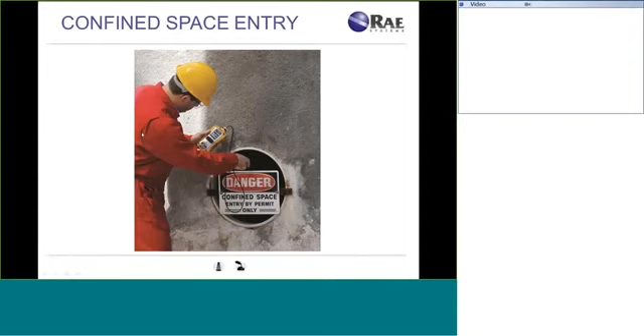Just to give you a quick reminder of how confined spaces are defined by OSHA: that's covered by OSHA Standard 29 CFR 1910.146. So a confined space is large enough for a person to enter and perform assigned work in. It is not designed for continuous occupancy, and it has a limited or restricted means of entry or exit. That's why it's confined.

But the type of confined space of particular interest to us for this webinar is permit-required confined spaces. According to OSHA, the difference that a permit-required confined space brings compared to a regular confined space is that it can contain, or has the potential to contain, a hazardous atmosphere. And that is very relevant to our topic today.

So gases, whether toxic or combustible, or oxygen deficiency or enrichment, are the potential threats within a permit-required confined space. Now, a permit-required confined space may contain a material that can engulf someone who enters the space. It may have a configuration that may cause a person to be trapped in it, and it may have other recognized serious safety or health-related hazards.

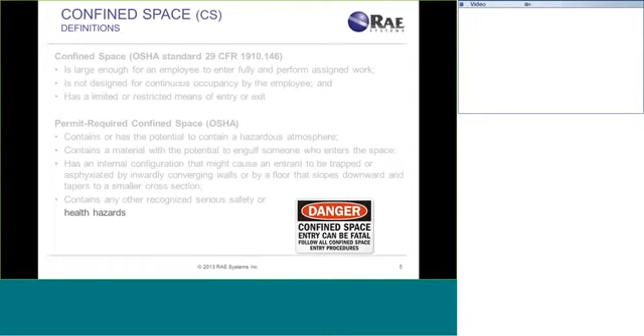So permit-required confined spaces is what we're going to focus on today, and we're going to see how wireless is making entry into permit-required confined spaces safer.

Now, let's take a quick look at the participants involved with a confined space entry into permit-required confined spaces. There is a person actually doing the entry and performing work inside a confined space. Then there is an attendant who is directly watching that person. And there is an entry supervisor who is responsible for the entire process.

Here are some duties that different participants in a confined space entry have to fulfill according to OSHA. These are just select duties. There are big lists of duties that OSHA outlines for each of the three types of participants, but we're going to focus on those that can be simplified or improved using wireless technology.

One of the things that the entrant has to do, according to OSHA, in addition to the actual work they do inside a confined space, is to maintain communication with the attendant, to inform the attendant of the status of the person performing confined space entry, and to enable the attendant to make decisions related to whether it's safe to proceed or necessary to evacuate.

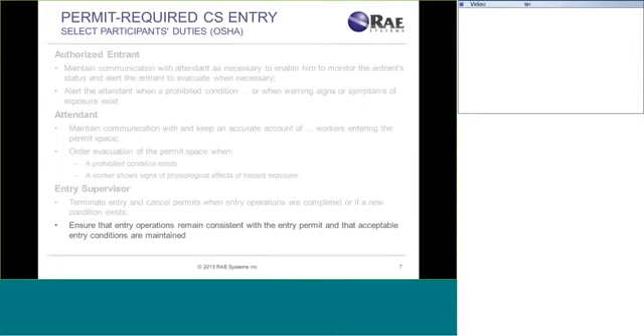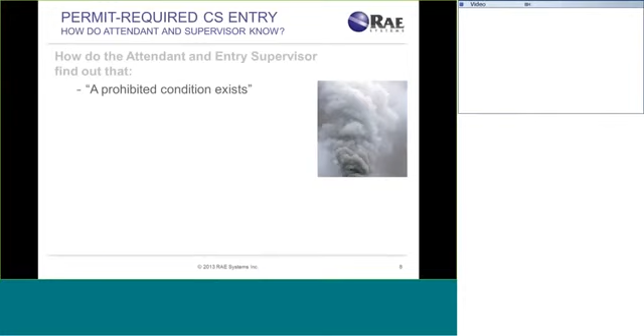Now, there is a very important question that remains regarding how the attendant and the entry supervisor, who remain outside a confined space, find out that, for example, a prohibited condition or a hazardous atmosphere emerges inside. How do they know that the worker is down, or shows signs of physiological effects of hazardous exposure, as OSHA defines it? How do they know that acceptable entry conditions are maintained throughout the process of confined space entry?

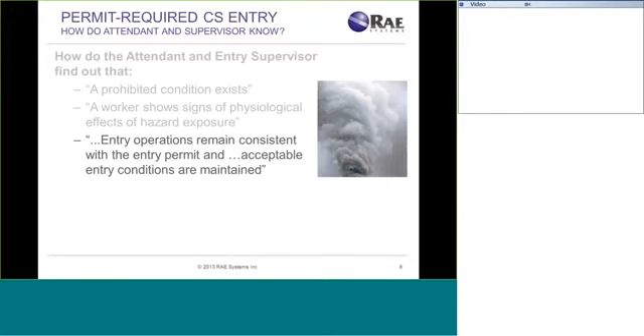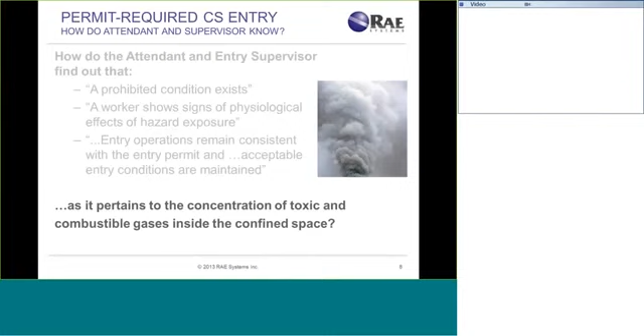What we're looking at here is really gas detection-related hazards, as well as man down, as the condition of the entrant. There are some things we're not covering in this webinar because this is a webinar about gas detection, so we're looking at the conditions of the atmosphere inside a confined space. There can be a lot of other factors that may make the conditions of confined space entry unacceptable, but we're focusing on toxic and combustible gases as well as oxygen deficiency or enrichment.

So the old ways, the common ways for the attendant and entry supervisor to get information about the conditions of a confined space, is really to rely on the entrant to communicate all that information back. As it pertains to gas concentrations, the entrant would be required to look at the monitor with a certain periodicity and then communicate the readings of the concentrations of toxic and combustible gases and oxygen inside the confined space over a walkie-talkie to the attendant or the entry supervisor.

Now, there are some potential issues with this approach as they pertain to safety and the ability of the entrant, the attendant, or the entry supervisor to react to changing and potentially hazardous conditions quickly. The reason for that is neither the attendant nor the entry supervisor know directly and immediately what is going on inside a confined space or what is happening to the entrant. They rely on the entrant to obtain that information.

So in case, for some reason, the concentration of a toxic gas or combustible gas, or the oxygen itself inside a confined space changes, they will not know about it unless the entrant reports it. What happens if an entrant has been overcome? The attendant or the supervisor would not know that until the next planned communication session. That is not going to happen because the person is overcome, and so it may be too late.

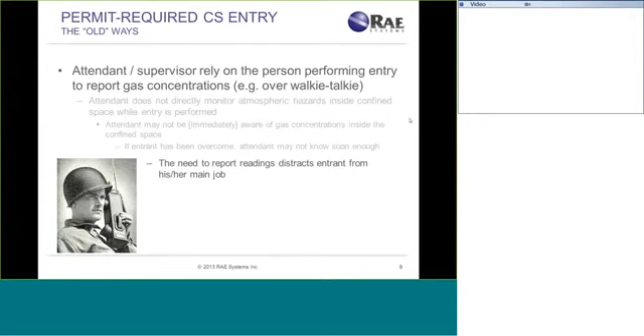Now, even if everything goes well, the entrant doing work inside a confined space, which is the reason for that entry, would have to distract themselves from performing that work in order to periodically report back to the attendant on what is going on and let them know everything is okay. So there are some inefficiencies with this process, with the current way of doing it, and in some ways it has inherent limitations in terms of the ability to deliver help to the entrant quickly.

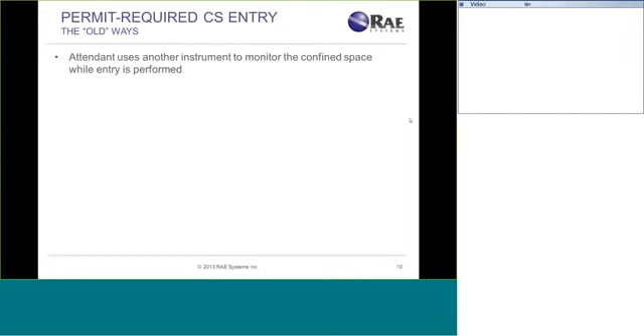Now, a better way that is used currently is for the attendant to use another instrument, a redundant instrument, to monitor the confined space in order to be able to directly get first-hand objective information on the condition of that confined space, the atmosphere inside a confined space. And there are a couple ways in which this is done.

There are some legacy instruments that allow the attendant's instrument to directly communicate to the entrant's instrument over a cable. So the entrant is physically tethered to the attendant. The entrant's instrument is connected to the attendant's instrument with a cable. And the attendant's monitor really shows exactly the same readings as the entrant's monitor shows, so that the attendant is aware firsthand of what is going on inside a confined space.

Another way is for the attendant to have his or her own instrument that has a sampling line that goes straight inside that confined space, so that the attendant's instrument is not tethered to the entrant's instrument, and the attendant gets objective information on the condition of that confined space by drawing a sample from that confined space.

So there are some potential problems with that, because if it's a stratified, if it's a tall confined space, then the attendant may not exactly know the level on which the entrant is physically located, since different gases, potentially hazardous inside a confined space, can be present at different levels of that confined space. And then the attendant may be monitoring from a different level than where the entrant is, and there could be a danger at the entrant's level of the confined space, and it could be all clear at the level from which the attendant is monitoring. So there is no guarantee that the attendant will be monitoring gas concentrations from the right strata of that confined space.

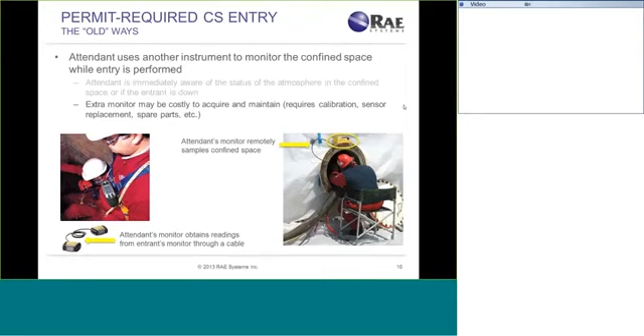Now, keeping that in mind, in some cases, even with the new wireless approach to confined space entry, it may be beneficial for an attendant to have a second monitor, right? Because if it's a stratified confined space, and for example, if the attendant needs to be able to get information from the entrance to that confined space, for example, for rescue workers to be able to enter and make decisions on their personal protective equipment, in that scenario, it's very beneficial for the attendant to have a second monitor regardless.

But let's look at the new way. A lot of our customers have discovered the benefits of wireless to be so significant for confined space entry, for the improvement of safety related to permit-required confined space entry, that this is their standard operating procedure.

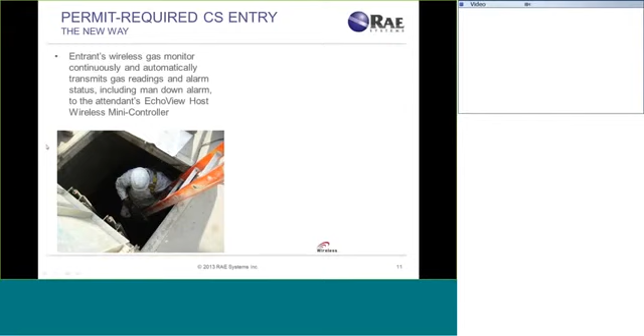So instead of using a regular multi-gas monitor, an entrant has a wireless multi-gas monitor that has a wireless modem inside. So this way the monitor wirelessly transmits its readings and alarm status to a portable mini controller, a wireless device that shows the attendant the real-time readings and gas concentrations of the entrant's monitor. Now, keep in mind that the wireless monitor transmits continuously, and it also does so automatically, so the entrant does not even need to worry about making sure the attendant knows the gas readings inside a confined space.

So the attendant's EchoView host mini controller, that you can see in the picture, shows real-time gas readings and alarm status from the entrant's monitor. And by the way, if there are multiple entrants, the EchoView host can display readings and alarm status from multiple monitors, up to 8 monitors at a time. And that mini controller has its own audible alarm. It has alarm lights as well to attract the attendant's attention in case the entrant's instrument goes into alarm.

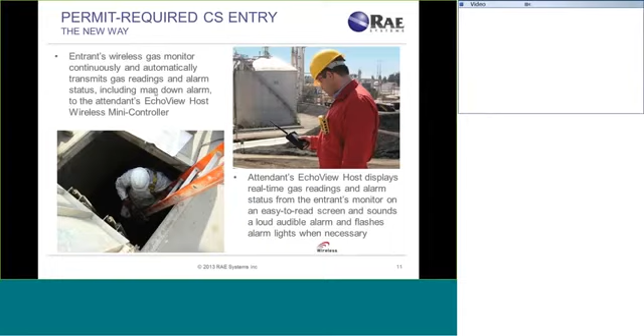So what are the elements of this solution for the entrant? And if the attendant uses a redundant gas monitor, the solution includes a wireless multi-gas monitor, such as the MultiRAE family of wireless multi-gas monitors. These instruments have not only the built-in wireless capability, they also have the man-down alarm.

And the man-down alarm activates in case the entrant is not moving for a certain period of time while the entrant is supposed to be moving and performing work. So the instrument assumes that the person is down, the person has been overcome, and provides the person a notification asking if the person is okay. And if the person says, yes, I'm okay, then the man-down alarm does not activate. But if the person does not say, yes, I'm okay, or says, no, I'm not okay, the man-down alarm activates, and the attendant knows about it immediately.

So the attendant and the supervisor can have their own mini controllers, the EchoView hosts, as we call them, and these mini controllers would display information from multiple instruments, like we talked about, and they can be at significant distances. The typical distance is 660 feet; it is going to be less than that in case the signal has to go through metal, but it would stay sufficient for most confined space entry, even if the confined space is actually a metal or a steel structure.

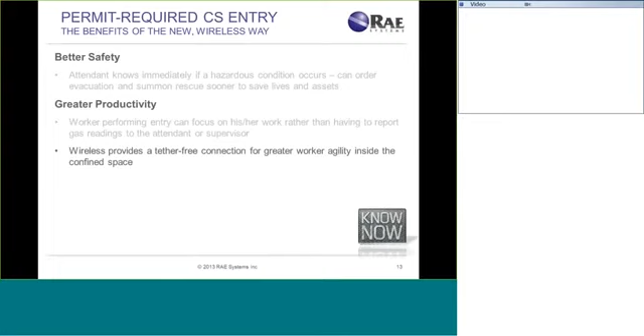And of course, the lower cost. The EchoView mini controller is virtually maintenance-free. All it requires is a periodic battery replacement, and the battery lasts 10 days, 24/7, which is unlike a second redundant gas monitor, which requires maintenance, sensor replacement, calibrations, etc. So the wireless way of performing permit-required confined space entry delivers better safety, greater productivity at a lower cost.

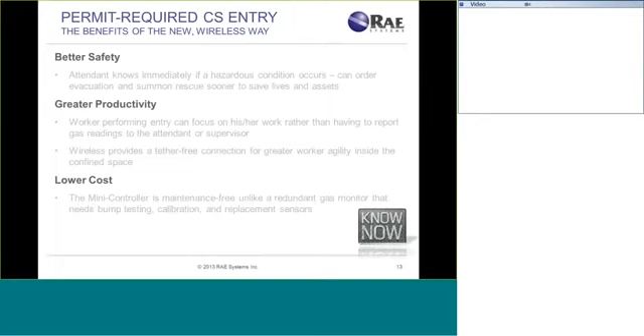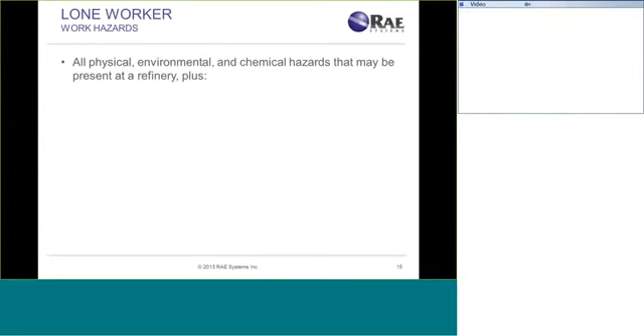So the next application I would like to discuss is the safety of lone workers. Lone workers are people who do their work without having other people in immediate vicinity. So they do work unsupervised, and in addition to that, there may not be any person around to help out or call for help in case something happens. So work hazards that lone workers experience at a facility include all the typical work hazards at a refinery: physical, environmental, chemical, electric, falls, etc. But they also have nobody around to call for help in case the lone worker has been overcome.

So how is safety monitoring of lone workers done these days? It usually involves a multi-step program to make sure that the lone worker is okay, does the work safely, and returns home every day. That may include the supervisors periodically going out and physically visiting the people that work alone to make sure that everything is okay. Then they could maintain a pre-agreed schedule of regular communications that occur between the lone worker and the supervisor or the safety officer at the command center.

For that, they would use either phones, if it's safe areas, or intrinsically safe walkie-talkies to communicate if it's a hazardous area, or both, depending upon the area classification at a refinery, for example. Now, the people at the command center and the supervisors can use warning devices that can trigger alarms in case no communication from a worker working remotely has been received. And there could also be a system implemented that ensures that a lone worker has returned to their base after completing his or her job.

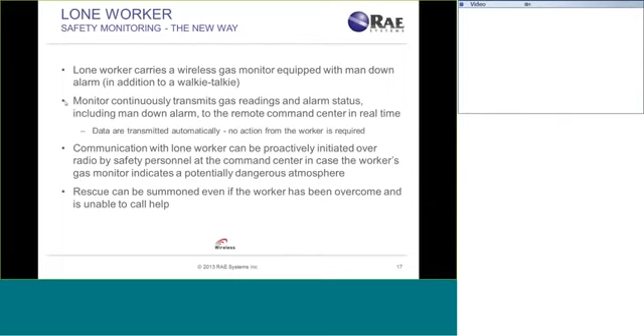So the elements of the new wireless solution for lone worker safety include the wireless gas monitors, both single gas and multi-gas, accompanied by a portable modem that, in addition to being able to transmit the signal to the remote command center at distances up to 2 miles, provides accurate GPS-based location information to the remote command center, and the remote command center that runs the RAE Systems ProRAE Guardian real-time wireless safety system software that can overlay the location of the remote worker on the custom map of the facility, so that they know exactly at each point in time where the worker is located within a 15-foot range, within a 5-meter range. It's so accurate.

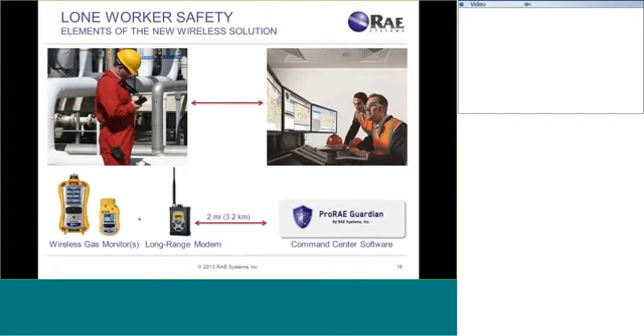So what are the benefits of a wireless-based lone worker safety solution? The key benefit is enhanced safety, where the personnel at the remote command center or the supervisor of that lone worker know immediately if a hazardous condition occurs or a worker has been overcome. This way, help can be dispatched quickly and lives and assets can be saved. Now, better productivity. The worker does not have to report the readings of the gas monitor that he or she carries. This is all done automatically by the monitor wirelessly, so the worker can focus on the work he or she is doing.

Now, the supervisor and the person at the remote command center can spend less effort and less time communicating with the worker just to obtain information on the condition of the atmosphere where the worker works, so that they do not have to request the worker to communicate gas readings from his or her monitor on such a frequent basis, because they have visibility into it continuously in real time. So the Lone Worker Safety Solution delivers improvements in safety and better productivity of lone workers and their supervisors while the workers are performing work at remote locations of the facility.

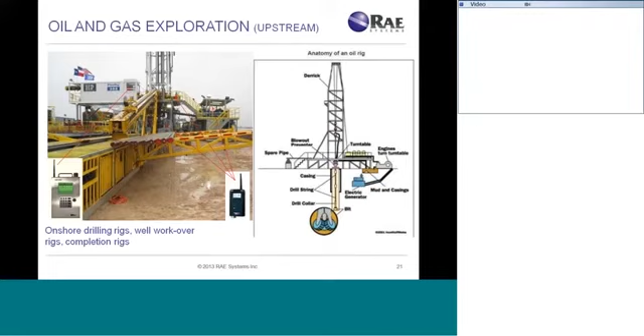Typically, a rig would install several wireless gas detectors around the facility, where workers would be located, and then they all report back to a controller that's located typically in a safe environment, whether it's the doghouse or somewhere else on the pad. So we'll get into a little bit more detail.

So really, what's driving the adoption of wireless gas detection has to do with new technologies. For one, the low power mesh radios that are relatively new to the market. One of the big advantages is that there's a mesh topology that's used, which allows the detectors to not only talk to each other, but also to the controller. And what that does is it creates a wider footprint and a larger wireless coverage for all the detection equipment.

There's also some advancements in batteries. Many of the detectors use a primary lithium cell, which allows the detectors to run continuously for 6 months. That includes the detection and the data transmission of the radio. So a really incredibly long lifetime really adds to the ease of maintenance and the ease of deploying these systems.

Another advancement is the lightweight materials. There's a lot of newer plastic and rubberized materials that are suitable for outdoor environments, very harsh environments, particularly on drilling rigs. They allow for IP65 NEMA 4 for water and dust protection. We also have offered optional stainless steel housings. If anybody's been in a rig environment, there's a lot of moving pieces, and equipment is often broken. So we offer a stainless steel housing as another extra layer of mechanical protection.

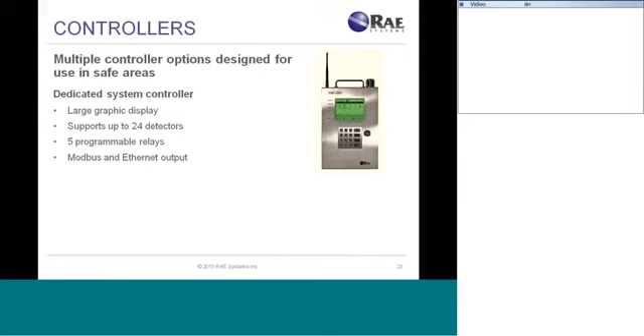Okay, so that's a little bit on the detector side. Once those detectors are deployed, they need to report their data back to a centralized location. There's several different types of controllers designed for use in safe areas. The first type of controller is a dedicated system controller. It typically consists of a large graphic display and supports multiple detectors. Inside of these boxes, there are 5 programmable relays that can be used to trigger lights, horns, other alert notifications. We've even seen some people use them for process control, when they need to immediately shut off part of their process. They can use the relays inside the dedicated system controller.

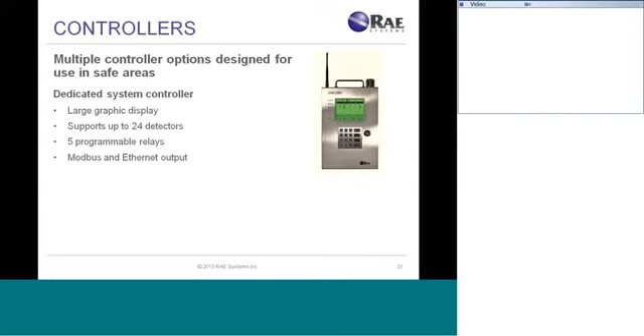And also, typically these controllers have various forms of data output. They have Modbus output, which is the more traditional way of outputting data. They also have Ethernet output, meaning you can push that data through a network. And I'll talk a little bit more about that in the upcoming slides.

The other type of controller that we have seen some adoption on is the PC-based controller. Essentially it enables the use of a standard Windows PC as a system controller. Our particular software is called ProRAE Guardian. It's really a command and control. It monitors all of the relevant data and alarm conditions, as well as keeping track of the historical data. It supports, again, multiple detectors, and it also has serial and Ethernet outputs.

One of the big advantages of a PC-based controller is that the PC is capable, obviously, of doing a lot of different things in addition to monitoring the safety detection system. So once the data is on the computer, you have a lot of flexibility in what you want to do with that data and how you want to share it with other interested parties.

So one of the big advantages of having a wireless gas detection system is that you can have extreme flexibility for the rig. So wireless systems provide the maximum versatility. You can use LEL and H2S heads at the cellar location, LEL and H2S heads at the shaker, SO2 at the flare pit, and then a lot of times we see H2S on the fence line to monitor the footprint.

And this is just one particular example of this rig. The real point here is that because they're wireless, because they're extremely portable, they can be deployed in any fashion that's necessary, and they can be easily moved and rearranged as required. One of the particular interesting ones that we've seen is the fence line monitoring application, particularly where there is drilling activity going on in close proximity to residential neighborhoods.

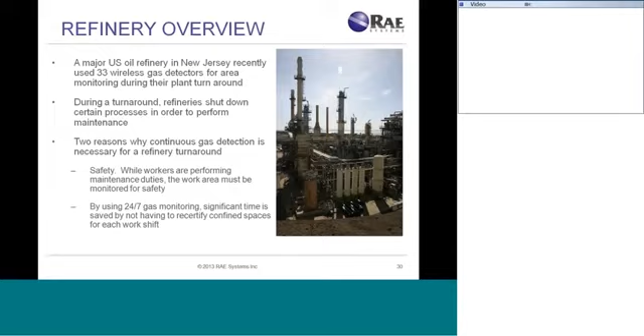Okay, so what equipment are these guys using for the continuous monitoring? They're using a multi-gas detector that's a field-proven multi-gas and radiation detection instrument. They can choose up to 5 internal sensors, any of the toxic gases, flammable gases, radiation, oxygen, broadband PID detection. All of those can be enabled inside of one detector.

The detector you can see in the graphic there has a large antenna coming off of it. It has an embedded license-free radio, so it's a bit different than the mesh technology we just talked about on the drilling side. This is a frequency hopping spread spectrum technology radio, and it transmits at a higher power. Because of that higher power, you can go up to 2 miles away from your controller and still receive all that real-time data and alarm notifications.

The other advantage of having this particular system is the detectors have optional GPS. A lot of times in a refinery situation, the detectors are outdoors, and by using GPS, not only are you tracking the data and alarm conditions, but also the location of that detector. Every time a data packet gets sent, it has a location stamp along with it. So retroactively, when looking through your data log or running reports, it's very easy to tell where that detector was located when it went into alarm or detected certain levels of gases.

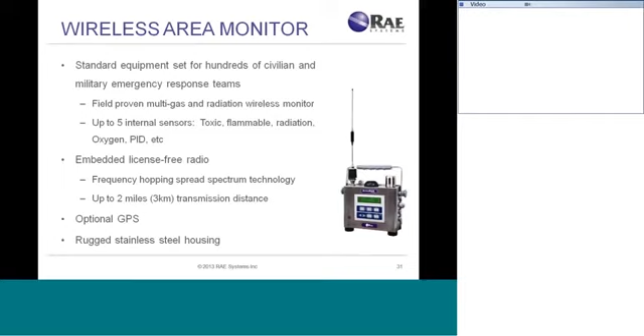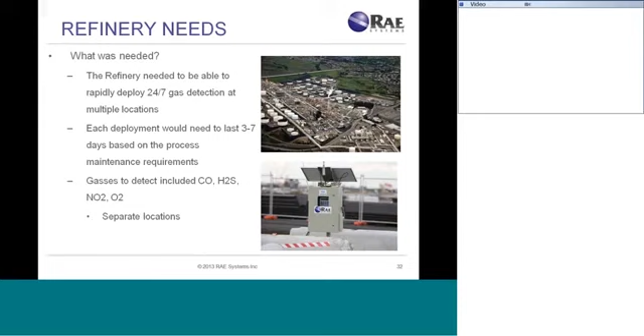The facility has 6 independent wireless gas detection networks that are linked to a local control room. The big question for these guys was, how do we get the data from all of our gas detectors onto one screen? They have one safety personnel at the top of the ladder who wants to be able to view all of the data in real time.

So now not only was the local process safety personnel informed in their localized area, but all that data runs over a network through the software and goes back to their master control room, where the safety manager can view all 6 of those different processes and alarms and notifications all in real time.

In addition, it really helped. One of the big drivers for this particular application was the aggregation of that data. So when it came time for the safety manager to write his reports, all of that data is already aggregated in one place, time-stamped, and everything is monitored at one time in one place. When it came time to submit his reports at the end of the turnaround, the software facilitated that and saved him hours and hours of time that he would have normally had to spend gathering data from different locations.

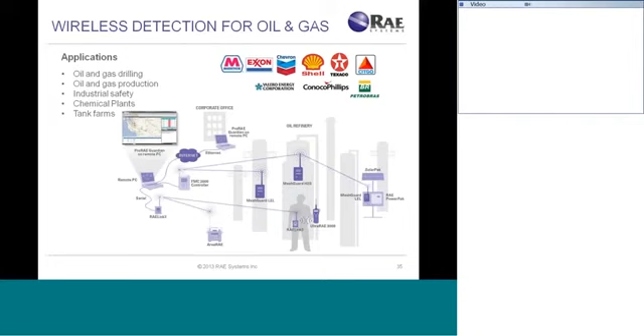That's all I have for you today. I'll pass it back to Stephen, and I think we're going to have a little bit of time for questions and answers.